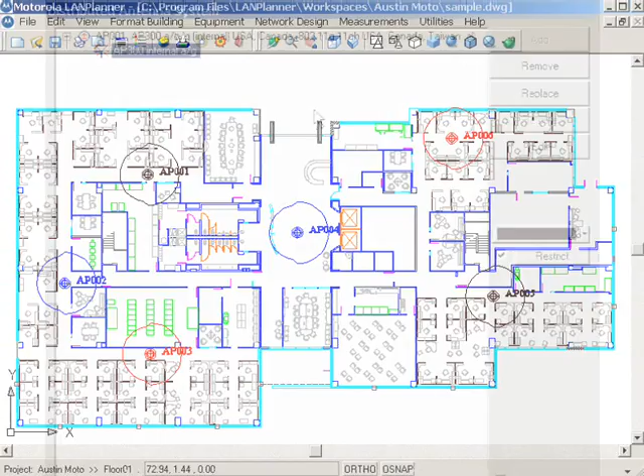Welcome to Motorola LANPlanner's demonstration video, which will provide an in-depth look at LANPlanner functionality and usage. This software enables network planning teams to design Wi-Fi deployment strategies that are customized for their site. Each step of the process allows the user to adapt the design to meet their specific needs. This includes customizing the building model, choosing equipment, and predicting performance.

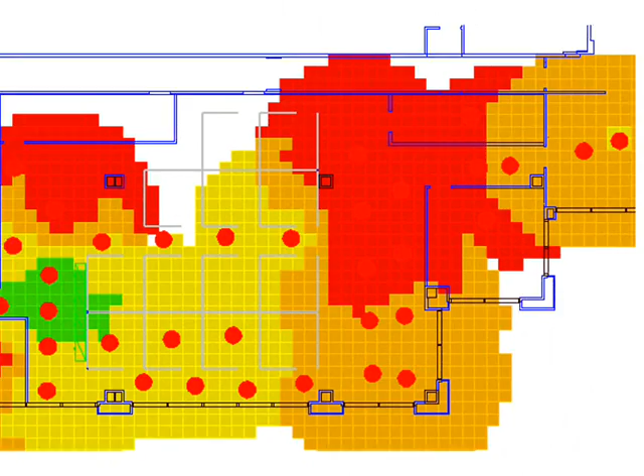LANPlanner allows the designer to take the end-user equipment and applications into consideration and provides a full suite of measurement tools. Combining all these abilities into one piece of software, LANPlanner users enjoy better performance by design.

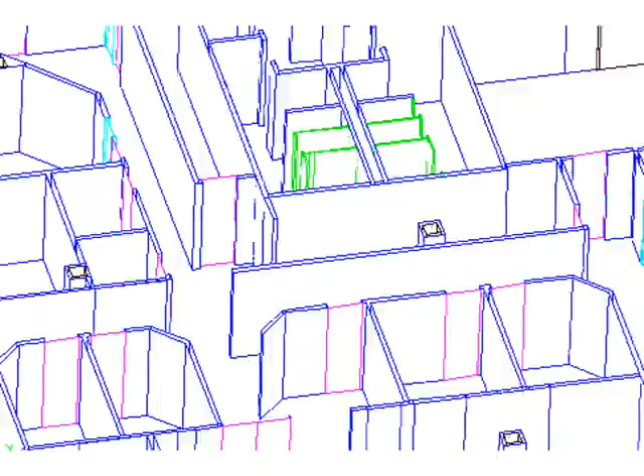The design process starts with the building model. The software allows you to import raster images, CAD drawings, or draw freehand. The building lines are then formatted. This is accomplished by assigning partition types to building materials as appropriate. LANPlanner comes with several predefined partition types which lend themselves to most common building structures. Most buildings can be formatted immediately with very little customization.

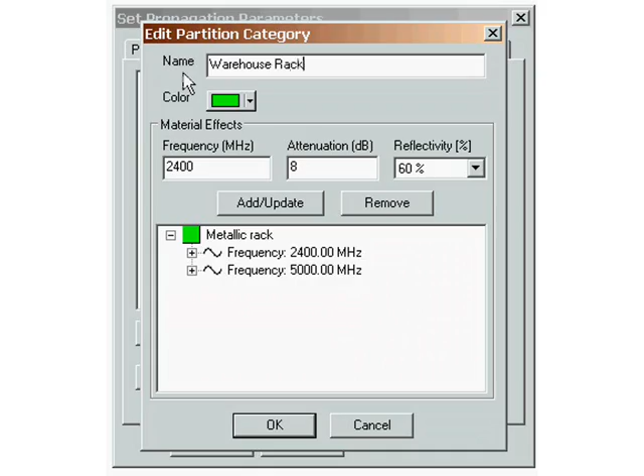However, for more challenging environments, partition types can be fully customized. Each partition type is assigned a name, color, and attenuation properties per frequency. During predictions, the RF signals react to these partitions, resulting in a site-specific building model.

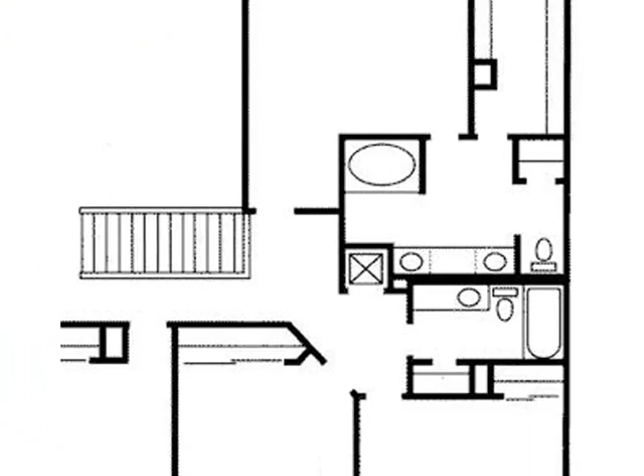LANPlanner allows you to import your building floor plan and obstacles into the software using AutoCAD technology. This makes the building model extremely accurate and flexible. If an AutoCAD drawing is not available, a raster image can be traced. Both workflows support multi-story facilities.

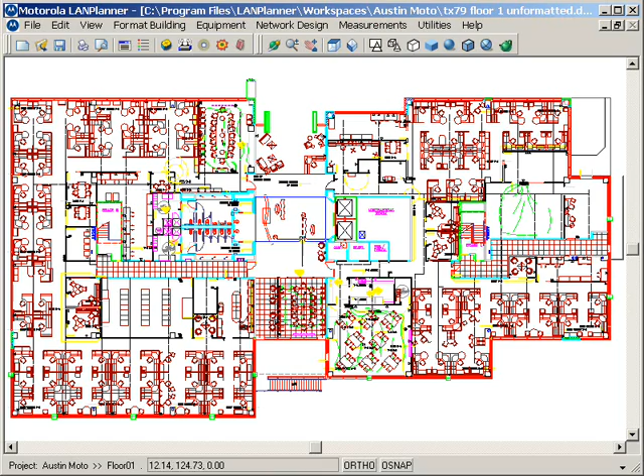LANPlanner takes all access points on different floors into consideration during the design, thus minimizing interference while maintaining full RF coverage. Let's look at the AutoCAD workflow for building formatting. First, an AutoCAD drawing for the facility is obtained. This drawing will be flat and contain many layers, some of which will be converted to building partitions.

Layers in the drawing are selected and are formatted by assigning a partition type and height. This is repeated until all relevant obstructions have been formatted. Only RF relevant obstacles such as doors, walls, and metal are formatted in the drawing. Some layers do not contain useful information, such as lighting and electrical displays. These are deleted.

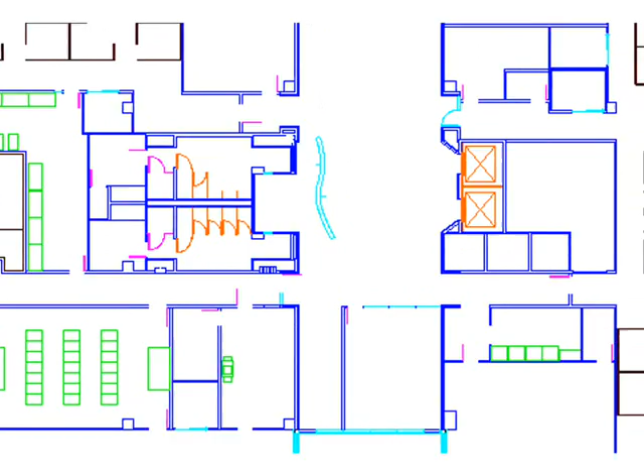After all the layers have either been converted or deleted, the building model is complete. If anything in the actual building differs from the drawing, it can be changed easily. Walls can be added or removed at will.

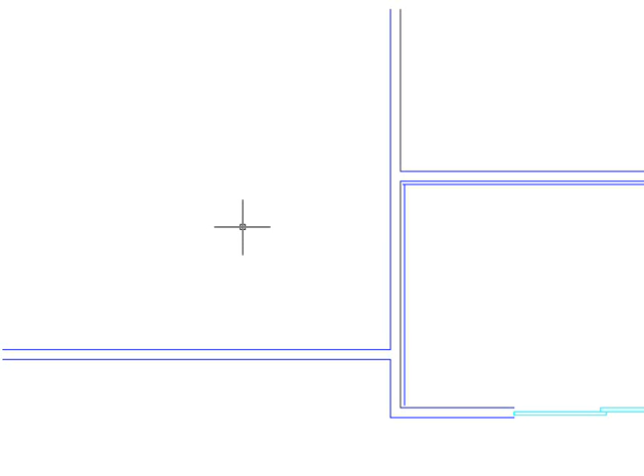It is important to model the building as accurately as possible, as this will affect the RF predictions. Only obstructions that would affect the RF signal need to be modeled. For instance, cubicle walls would definitely affect the signal, but furniture is too low. As you can see, each partition type has a certain RF characteristic associated with it.

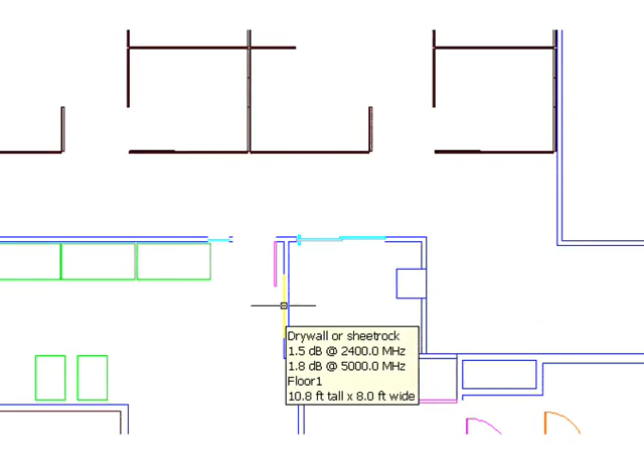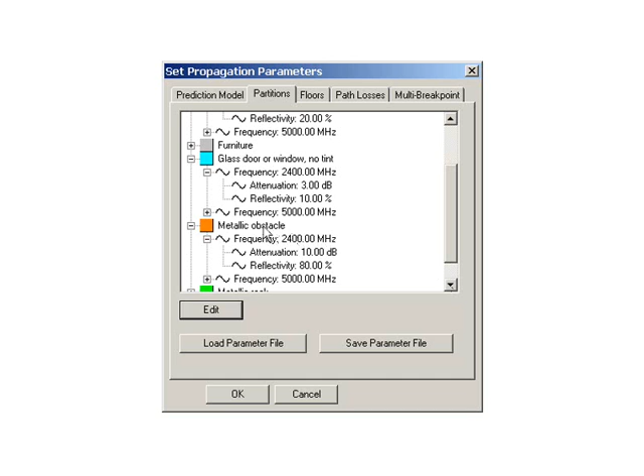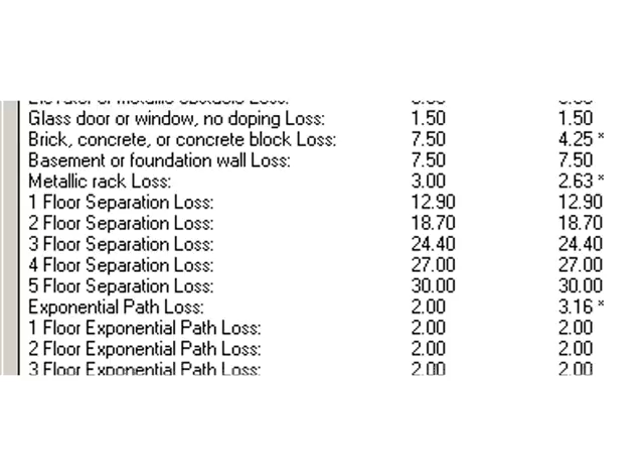The partitions that come with LANPlanner have RF properties that have been averaged. Through a process called optimization, these values can be fine-tuned for a specific building using measurement data. More on that later. The examples so far have used CAD drawings for the building model.

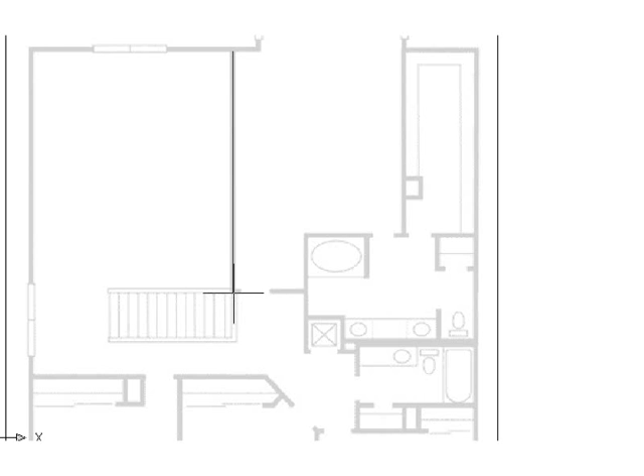If a CAD drawing is not available, a raster image can be traced. LANPlanner simulates a light table, and the important structures in the image are traced. To the software, the resulting building model is identical to those that came from a CAD drawing. Partitions, floors, and RF characteristics are treated exactly the same. With either workflow, the drawing units can be specified, English or metric.

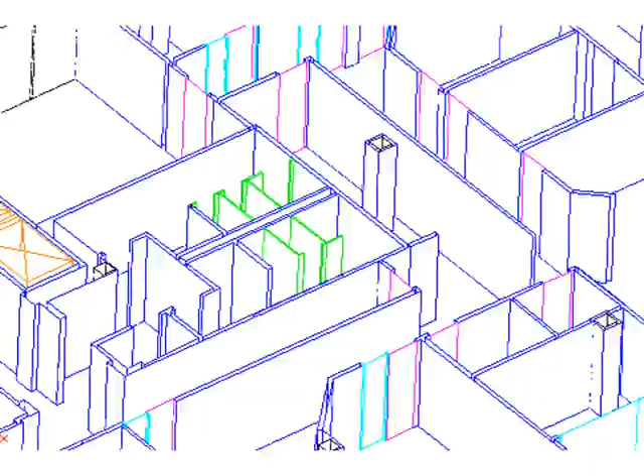LANPlanner provides all the tools necessary to facilitate the building model process regardless of the source materials. The result is a three-dimensional, multi-floor building that is RF intelligent and can be fully customized. The building model complete, now we can place equipment.

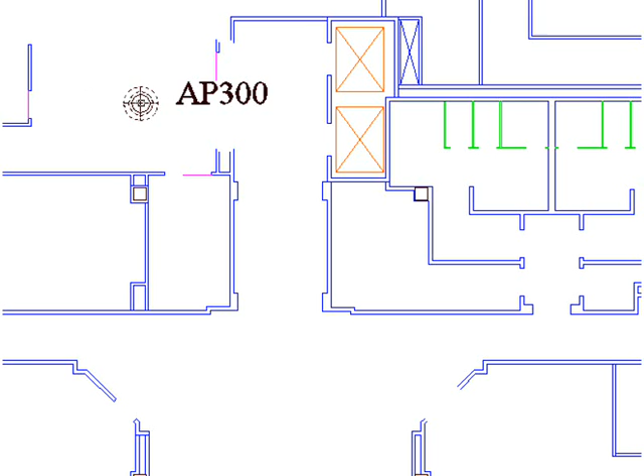Access points can be placed, moved, or deleted anywhere in the building. Channels and power settings are easily modified to experiment with different what-if scenarios. LANPlanner ships with all current Motorola access points and antennas ready to be used. In addition, Wi-Fi air interface standards are pre-configured to comply with regulations in most countries around the world.

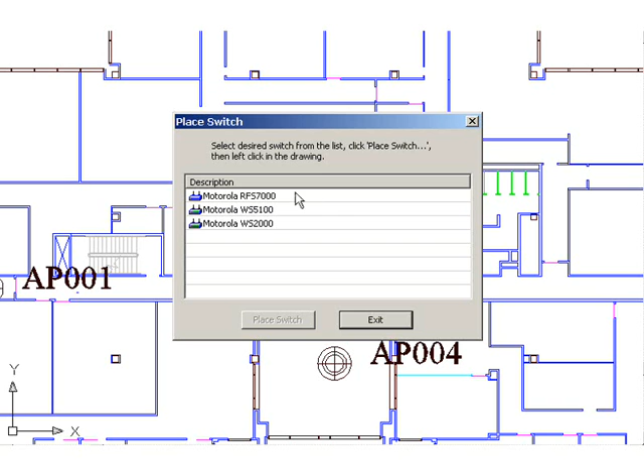Here is an example of placing and editing equipment. The floor of this building will be covered using Motorola AP300s. Since this building is in America, the United States version is chosen, which complies with that country's channel and power regulations. Dropping access points is as easy as clicking the mouse. To be more thorough, a switch can be placed and cable runs can be checked with the measurement tool.

Each access point is placed with default parameters, but they can be customized individually. Access point height, channel, and power can be adjusted.

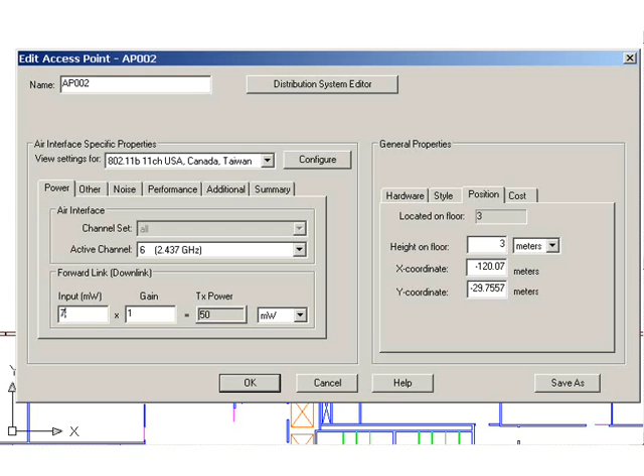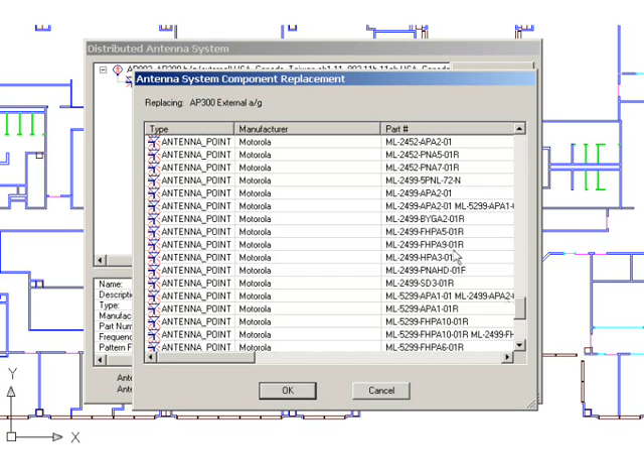These access points were placed with the standard omnidirectional antennas. However, for this hallway, a directional antenna might make a better choice. The existing antenna can be replaced and then oriented in the proper direction. New antennas can be added in the parts list library and reused in future projects. The Omni antenna has been replaced with a directional panel and its orientation is indicated in the drawing.

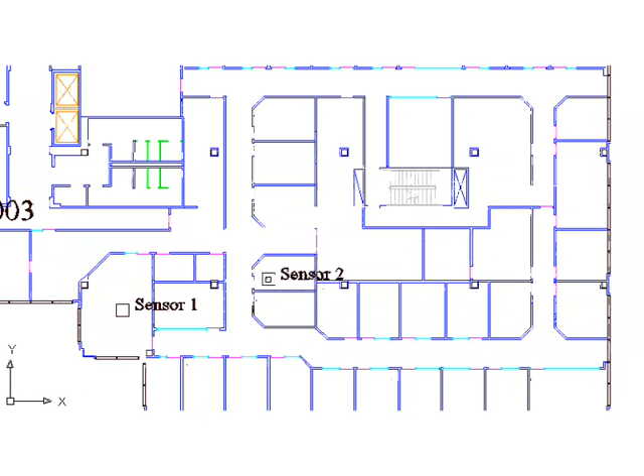Along with Wi-Fi access points, LANPlanner supports sensors as well as switches to assist with Wi-Fi planning. After equipment has been placed, RF predictions in the facility can begin. As with the building model process, care should be taken to place and customize equipment as accurately as possible, following real-world restrictions where appropriate.

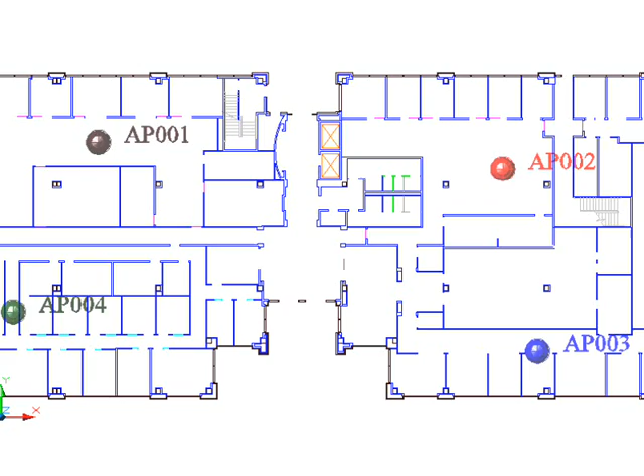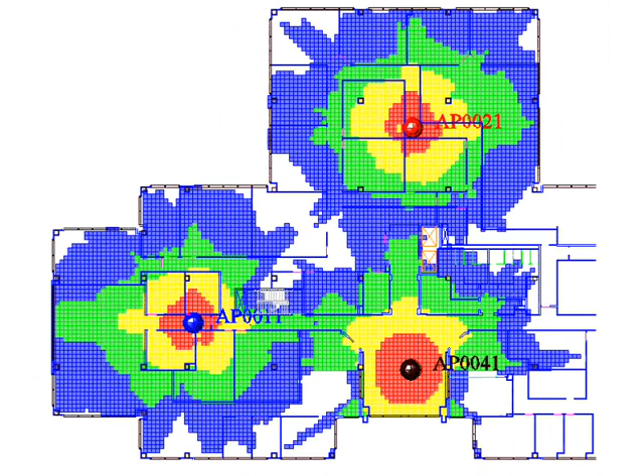LANPlanner RF predictions combine the RF intelligent building model and the Wi-Fi equipment to produce fast and accurate plots of predicted system performance. The software offers many distinct prediction modes that can be tailored to apply to a variety of scenarios. These prediction modes include contour, grid, instant point, and AP positioning. The results can be customized and viewed in many different ways.

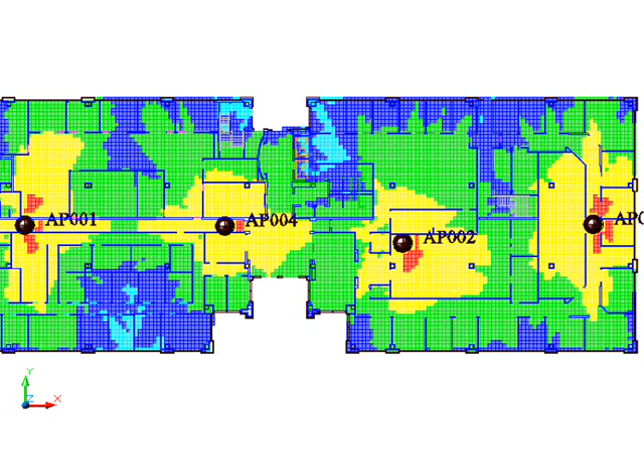Running predictions allows the user to try many different equipment and placement scenarios before deployment. This information helps the user avoid multiple site surveys and costly redeployments. A Quick Start AP placement feature assists in large designs or bid estimates. Let's look at these features in detail.

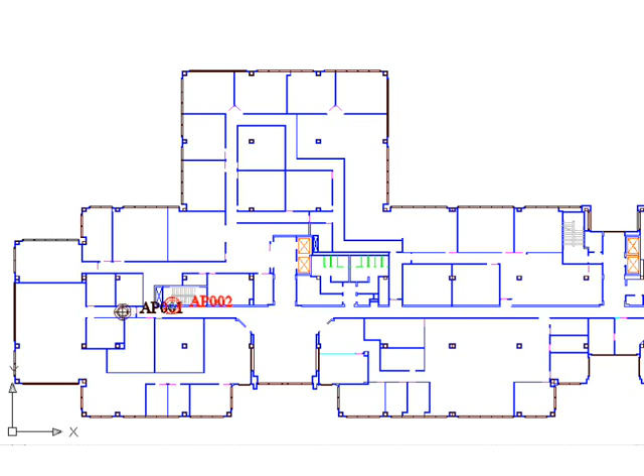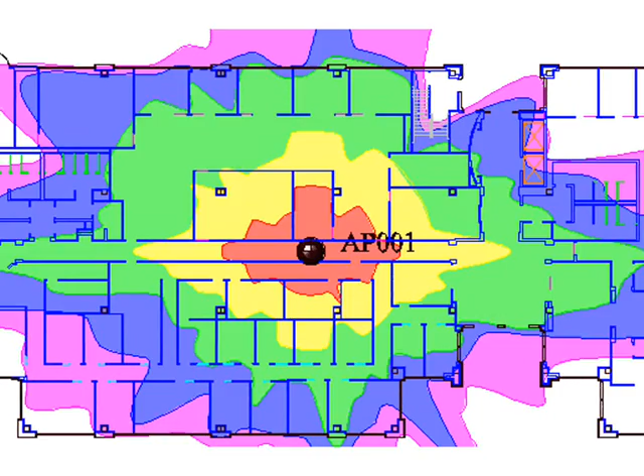After access points are placed in the building model, RF predictions can be performed. Contour predictions are the fastest to run and give a good indication of system performance early in the design. Contours radiate from each access point and are colored by signal strength. The number of contours, signal powers to display, and colors can all be defined. A legend is provided which is automatically updated to match the contour configuration.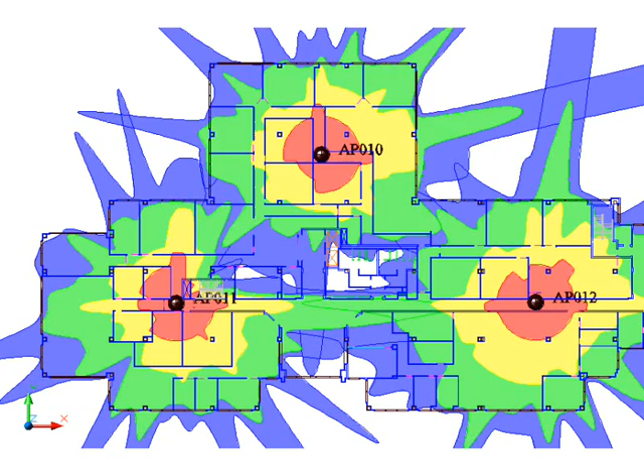Predictions can be run for one access point, all access points, or any combination. Even signal from a radio on a different floor can be displayed.

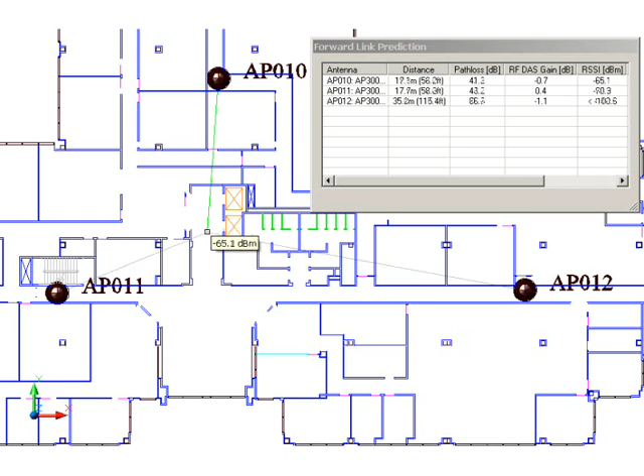Instant point mode provides a different kind of prediction strategy. Instead of displaying the prediction results on the entire drawing at once, this mode allows the user to see how all radios perform at a given point. This point can be moved anywhere in the building and is updated in real time. A green line indicates the path back to the current strongest radio.

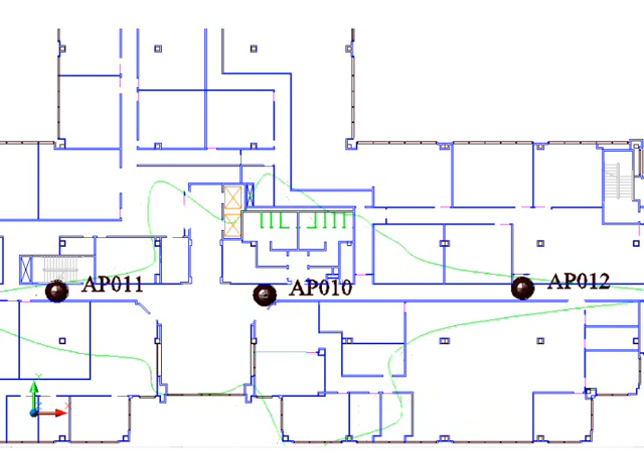Contour positioning is the complement to instant point mode. Instead of moving the client, the access point is moved by the user. The contour boundary at a given signal power is updated in real time. In this example, that boundary is -65 dBm. This mode can assist with strategic access point placement, helping the user to get the most out of their equipment.

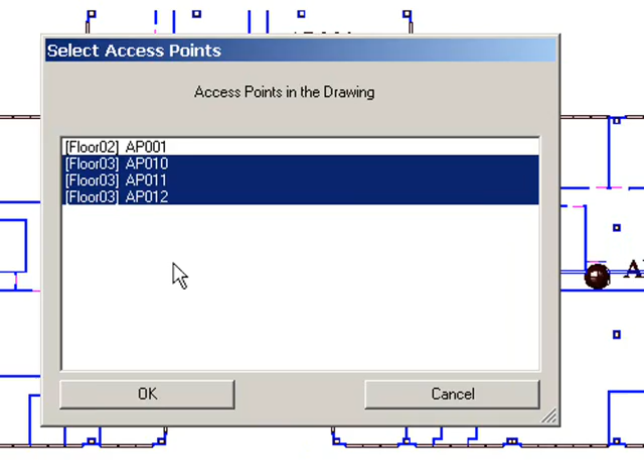Grid predictions are the most accurate and flexible offered by LANPlanner. After defining a prediction boundary, any combination of access points can participate. In this example, signal strength is plotted all the way down to the noise floor. However, a signal threshold can be used. Here, only signal better than -85 dBm is shown, giving a very clear picture of where the criteria is not being met. All of the signal levels and corresponding colors can be modified in the Color Scheme Editor.

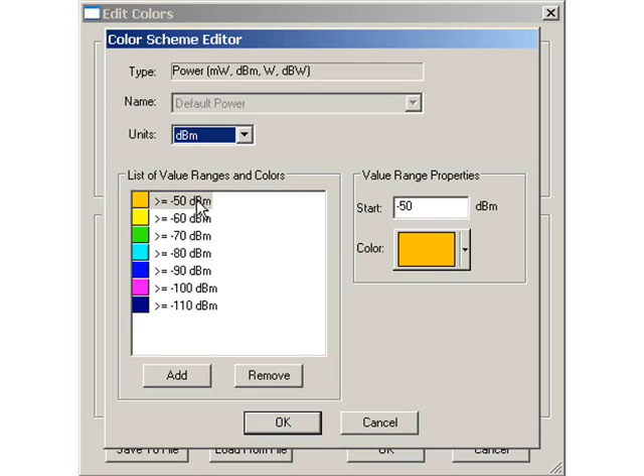In addition to signal strength, many other grid plots can be displayed, including signal to interference, best channel, and service counts. This last plot indicates where there is redundant coverage.

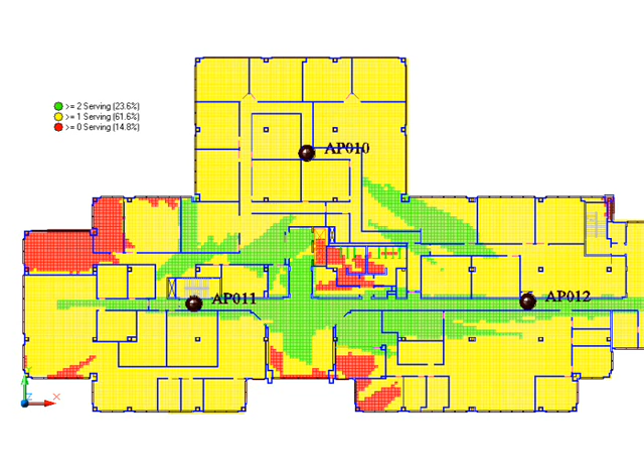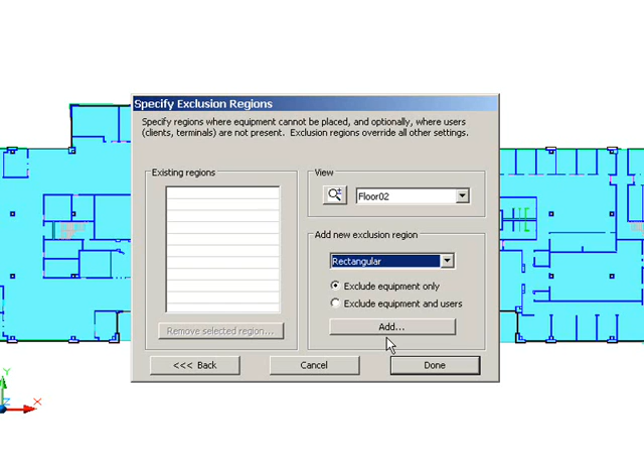The prediction engine can also recommend access point placement based on criteria provided by the user. A service region for coverage is defined that includes signal level requirements, capacity, and applications. Exclusion regions are also accepted, letting the software know where equipment cannot be placed. Given these criteria, the software recommends access point placement and provides a brief summary.

The various prediction modes offer many ways to assist in Wi-Fi planning. Contour and grid predictions allow the user to see predicted performance with various access point layouts. Contour positioning mode can help discover key access point positions that will provide the most coverage from each radio. Quick Start AP will make estimates to the amount of equipment needed given signal and capacity parameters.

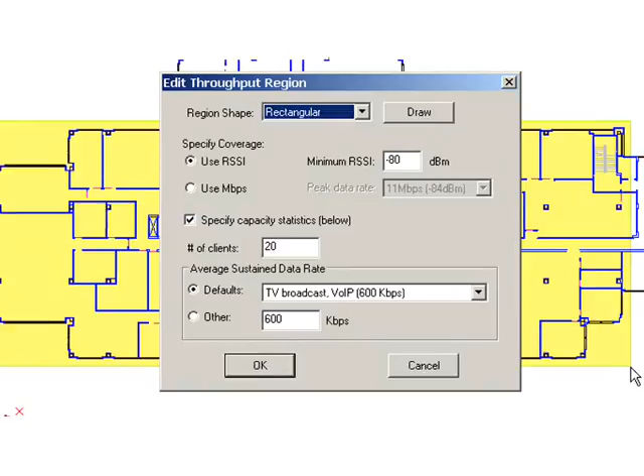LANPlanner's predictive capabilities allow the user to create Wi-Fi designs that work the first time. LANPlanner includes a suite of built-in measurement tools that complement the building model and prediction functions. We'll look at that area next.

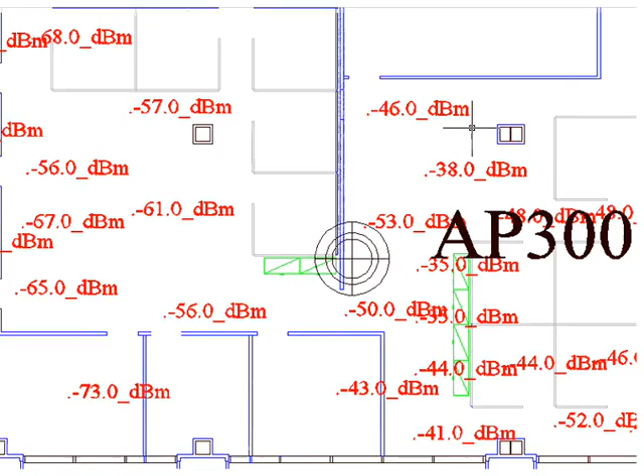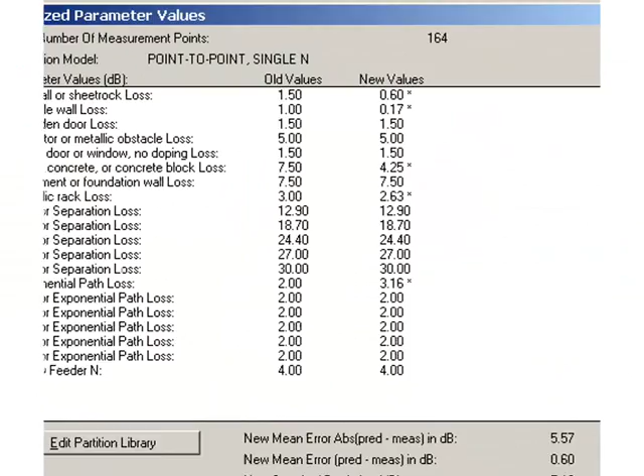Site surveys gather signal strength information from access points throughout the facility. The collected information can be presented in many different ways. Since LANPlanner is also a predictive tool, measurement data can be analyzed and used to fine-tune the building model in a process called optimization. In addition to traditional RF signal site surveys, LANPlanner can measure the actual network performance at the packet level, which is critical for applications such as voice over IP or streaming video.

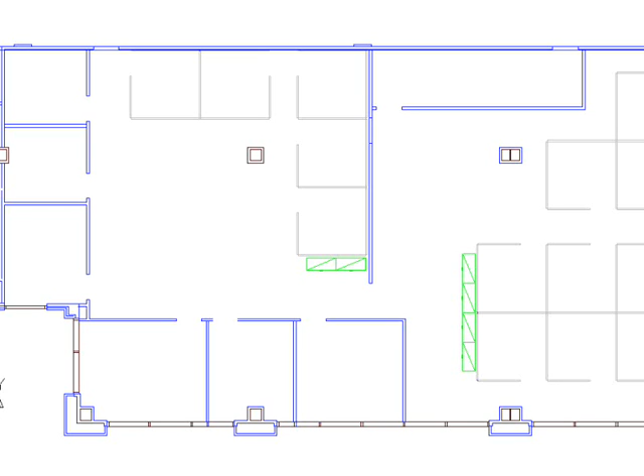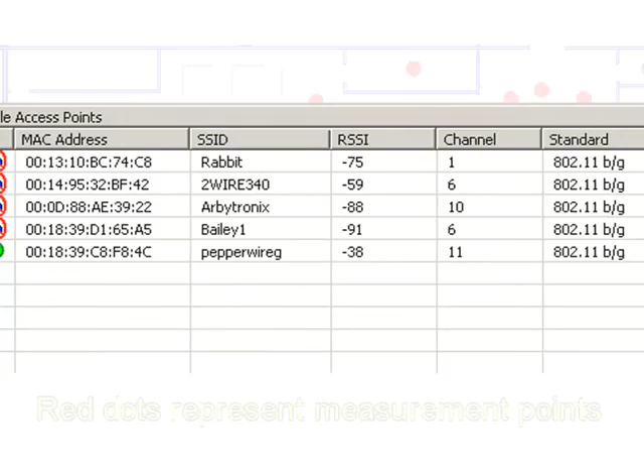Let's start by looking at a traditional RF site survey. Using the building model as a floor plan, the user walks the facility with LANPlanner and takes measurements on a laptop. At each measurement point, RF data is collected including SSID, MAC address, and signal strength. Two different measurement modes are supported: RF monitoring and AP performance.

RF monitoring mode requires a special Wi-Fi card, but channel scan time is controlled by the user, which results in a faster scan time and thus a faster site survey. With this mode, you can also obtain data about hidden or cloaked APs, and signals can be collected in both the A and BG bands simultaneously.

For AP performance mode, any standard Wi-Fi card with a Windows driver can be used. However, scan time cannot be controlled, and each band will need to be measured separately. This mode also enables packet-level analysis. For some applications, the performance of the network at a packet level is just as important as the RF signal strength. Therefore, LANPlanner offers network performance measurement capabilities.

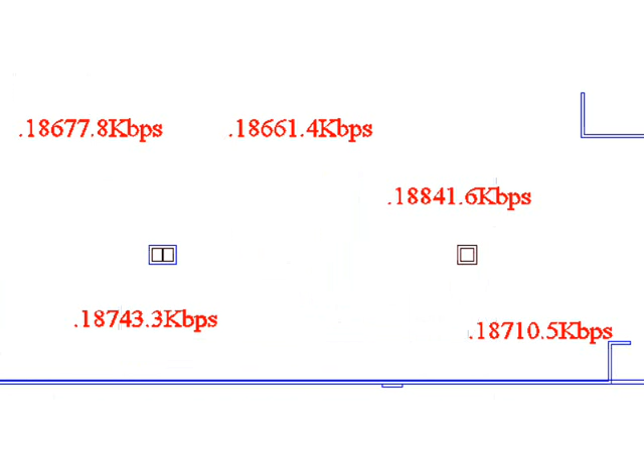A small application called SiteSpy is placed on the network and data is captured as packets travel to the measurement laptop. A variety of protocol options enables the user to simulate different applications. A site survey is performed in the same manner. However, network performance data is captured at the same time as signal strength. Real-time packet throughput, latency, and jitter are among some of the values that are gathered.

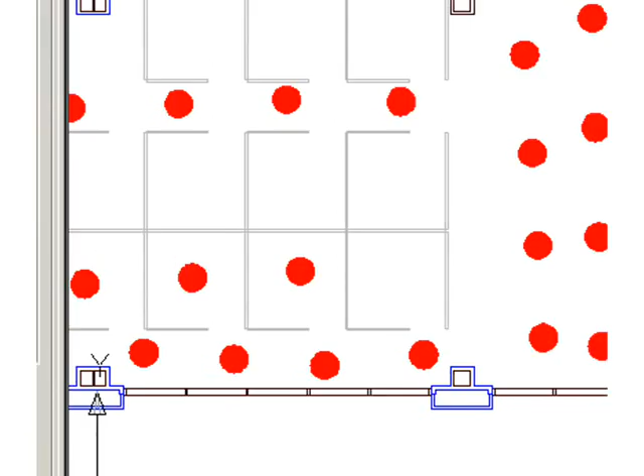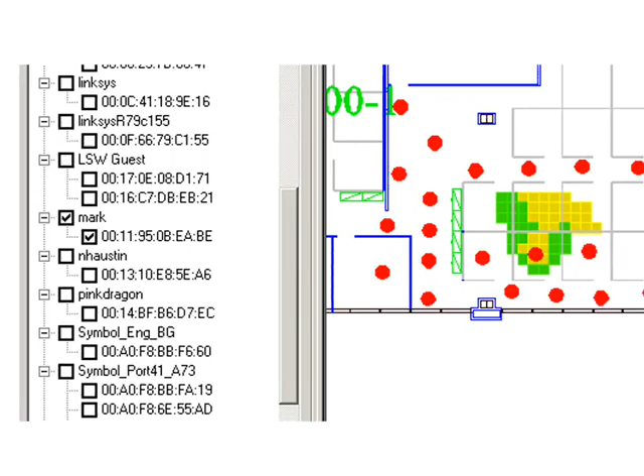Once the measurement data is collected, it can be represented in a number of different ways. Heat map visualizations provide an easy way to see measured performance throughout the facility. Data is organized by SSID and MAC addresses. Information can be shown for a single access point, by SSID, or all access points. In fact, with a strategic visualization, a rogue access point can be located. A heat map can represent signal strength, signal-to-noise ratio, channels, or other criteria. Exact signal strength readings from an access point can be plotted as well.

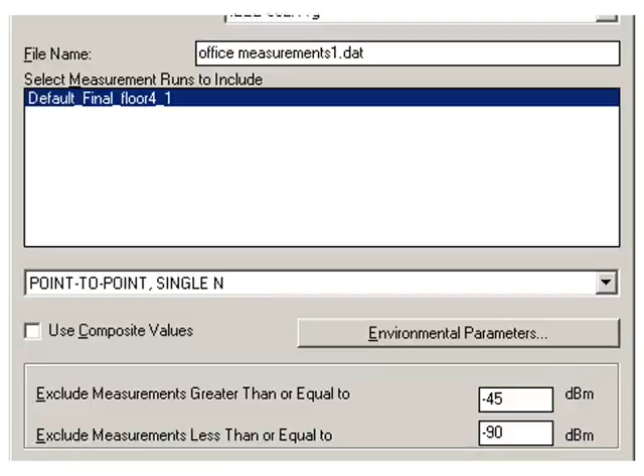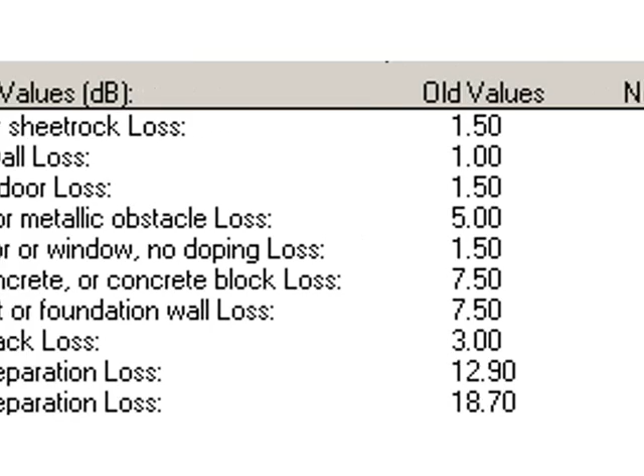LANPlanner can use measurement data to fine-tune the RF properties of a facility, resulting in a more accurate building model. Site survey measurements are taken from one or more known access points. The measurement data is then associated with these access points in the drawing. Given this, the software recommends new attenuation values that more accurately reflect the building materials in the facility.

In this example, the optimized parameters show that the original prediction was a bit too optimistic. The optimization process is optional, but can result in a more accurate prediction. This might make a big difference in a large or complex facility. Next, we will look at LANPlanner integration with RFMS, the RF management software tool.

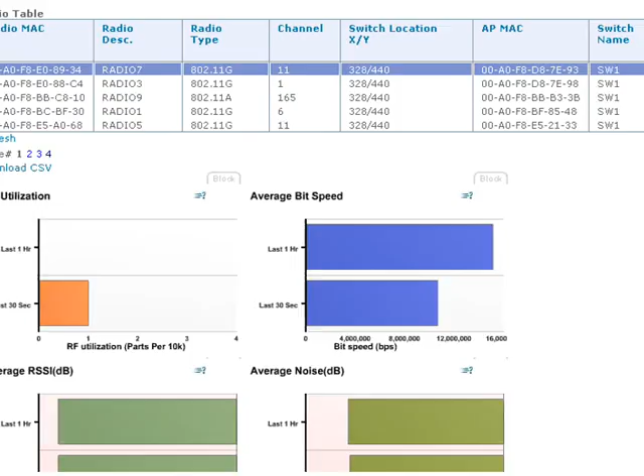Motorola RFMS is a browser-based visual management tool used to troubleshoot and monitor Wi-Fi deployments. Once a network has been deployed following the LANPlanner design, companies use RFMS to monitor and manage their installation. The LANPlanner design can be easily exported to RFMS and includes all of the equipment locations and RF intelligence.

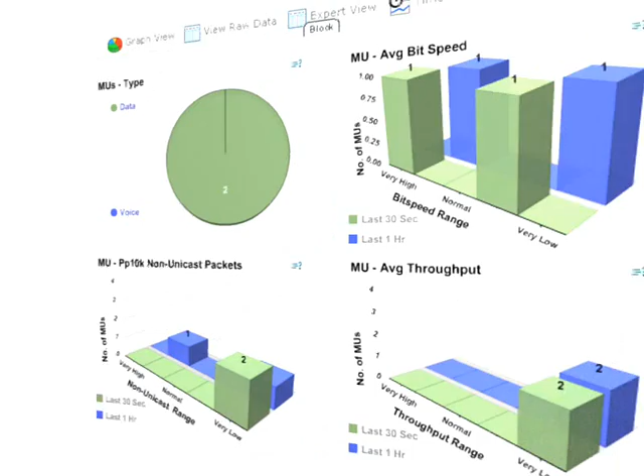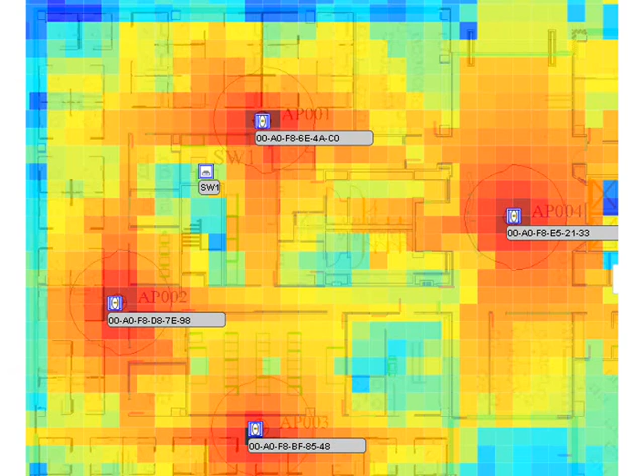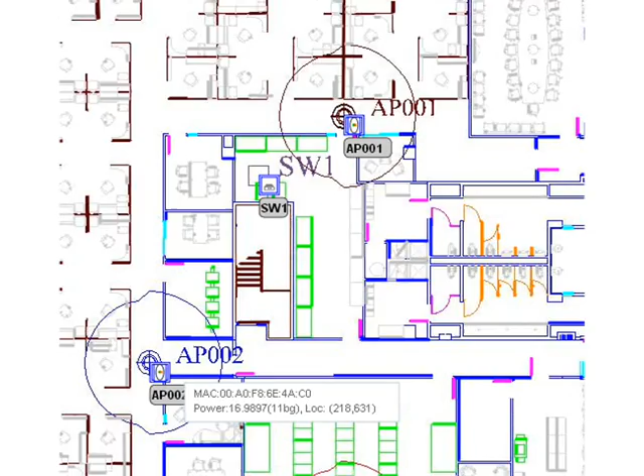RFMS features a variety of key performance indicator graphs which display network health at a glance. Users can view the status of all wireless devices and clients. The impact of access point outage can be displayed with a heat map. Even users with little or no RF experience can manage their Wi-Fi networks with easy-to-use menus and icons. Combining the building and design tools in LANPlanner with the management and troubleshooting functions in RFMS results in a Wi-Fi network that is both correctly planned and effectively monitored.

Thank you for viewing the LANPlanner demonstration. The wireless networks created with LANPlanner provide superior coverage, capacity, and overall quality of service for some of the most demanding applications, even in complex RF environments.